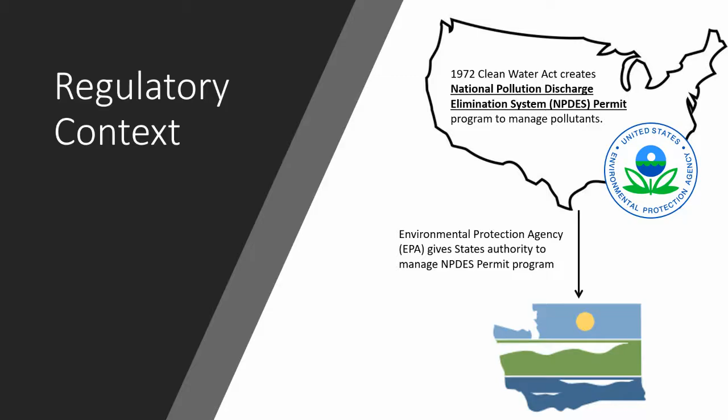The EPA authorizes states to manage the NPDES permit program. Washington State's Department of Ecology manages the NPDES permit program within the state. Ecology issues NPDES permits to municipalities like Sammamish. Sammamish holds an NPDES permit issued by the Department of Ecology. The intent of the permit is to help cities manage and control stormwater runoff and reduce pollutants entering our surface water. The city complies with our permit by incorporating specific components into our stormwater program.

Some examples of these components are mapping our stormwater pipes and catch basins, inspecting and maintaining our stormwater ponds and vaults, and enforcing stormwater rules on new development. There are several other components of the permit, but for the sake of brevity, I've only shown 3 here. The focus of today's video is on a specific NPDES program component, setting stormwater rules on new development. The NPDES permit program requires that cities adopt a stormwater manual, which sets stormwater rules for new development.

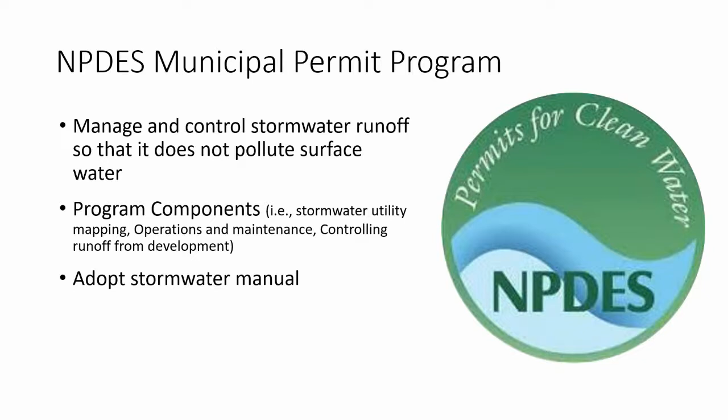I'll briefly touch upon some of the ordinances and code Sammamish has adopted related to stormwater. In 2016, City Council adopted the 2016 King County Surface Water Design Manual and Sammamish Addendum. By adopting and following the 2016 manual, the city remains in compliance with our NPDES permit. Sammamish Municipal Code, SMC Title 13, is our stormwater code. Title 13 defines the 2016 King County Manual and Addendum together as our Surface Water Design Manual.

SMC Titles 21A and 21B, the city's development code, specify that new development must follow the Surface Water Design Manual. In this way, all new development must build stormwater infrastructure to control and manage their stormwater. In 2019, City Council amended Title 13 code to add additional stormwater criteria. I'll review those amendments later in this presentation.

The city has adopted and requires development to adhere to the 2016 King County Surface Water Design Manual and Addendum, sometimes called the Stormwater Manual, Drainage Manual, or even just the 2016 Manual. All of these names mean the same thing. This is our adopted Stormwater Manual. Whenever I refer to the manual from here on out, this green book is what I'm referring to.

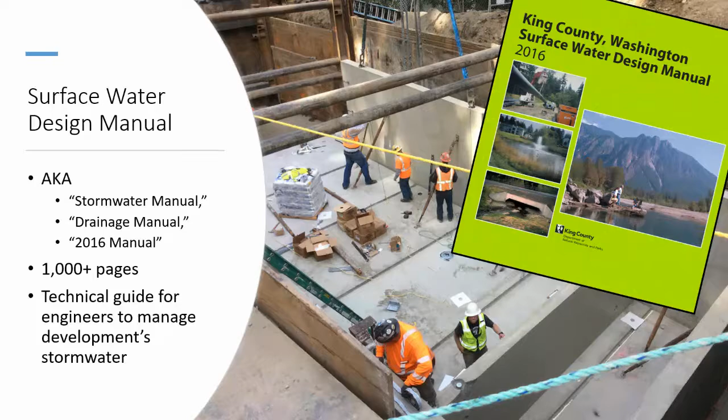The Sammamish Addendum was adopted at the same time as the 2016 manual. The addendum tailors the 2016 manual to meet the unique conditions within the city. Some examples include using Sammamish-specific forms and reducing the amount of allowed retaining walls in ponds. The addendum also contains area-specific stormwater maps for Sammamish, such as the one shown here, which depicts the landslide hazard and landslide hazard drainage areas in the city.

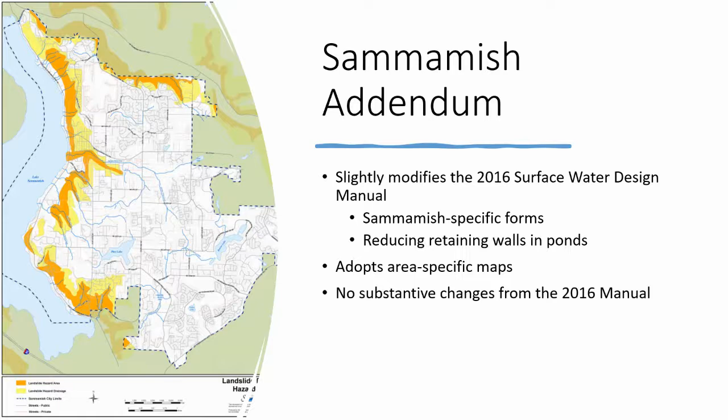Most of the changes made by the addendum are minor and were driven by aesthetic desires of the community. The addendum does not alter the fundamental design requirements in the 2016 manual. If the city deviated too far from the 2016 manual, we could risk being out of compliance with our NPDES permit or invite legal risk. Federal and state stormwater regulations have required us to adopt the 2016 Surface Water Design Manual.

Now we'll discuss the rules within the manual and how they're applied to development projects. I've done my best to condense and generalize very technical, nuanced concepts. For each PowerPoint slide here, there are dozens of pages in the manual that go into much more detail.

When a new permit application is submitted to the city, the first step in the Surface Water Design Manual is to start the drainage review process. In the drainage review process, staff review a project's stormwater plan and determine if it meets the stormwater requirements in the manual. For example, they review the stormwater pond design and make sure the engineer has designed it correctly to hold the right amount of stormwater.

Staff evaluate the project's drainage review type, which depends on the project's size and location. Staff also review the stormwater core requirements that a project must meet, which is based on the drainage review type. If the developer meets their stormwater requirements, staff can issue a permit.

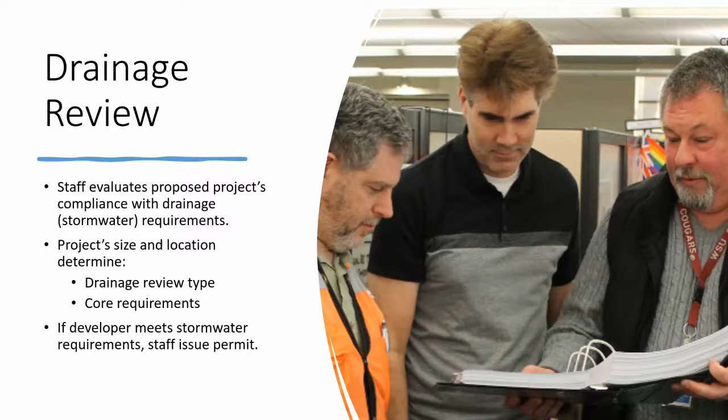As I said earlier, the size and location of the project determines a project's drainage review type. This chart shows the more common drainage review types in the 2016 Surface Water Design Manual. For brevity, I've excluded some of the less common types. The top drainage review type on this chart, which is no drainage review, has the fewest stormwater requirements. The amount of stormwater requirements increases as projects increase in size and complexity as you go down on this list.

I've included some examples of projects for each of the types of drainage review. Most small projects, like small additions or adding a deck, do not require drainage review. Simplified drainage review applies to most new single-family homes.

Targeted drainage review is unique and applies to most projects in the city's critical drainage areas. Critical drainage areas are landslide hazard and landslide hazard drainage areas, as well as areas that drain to Pine and Beaver Lake. Even very small projects in these areas must go through targeted drainage review.

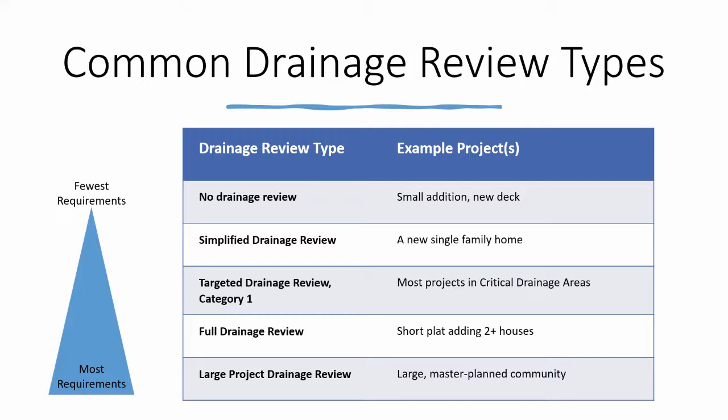Full drainage review applies to a project adding 2 or more homes, like many subdivision projects. Large project drainage review applies to master planned communities that propose to add more than 50 acres of impervious surface. This is not applicable to Sammamish.

The Surface Water Design Manual also has the 9 core requirements listed here. The core requirements are stormwater design measures a project must meet based on its type of drainage review. The project's drainage review type determines which core requirements it must meet. I've underlined the 4 core requirements that can be the most challenging for applicants to meet. We reviewed 3 of them in our last video: flow control, water quality, and flow control BMPs, and we'll go more into depth on these requirements now.

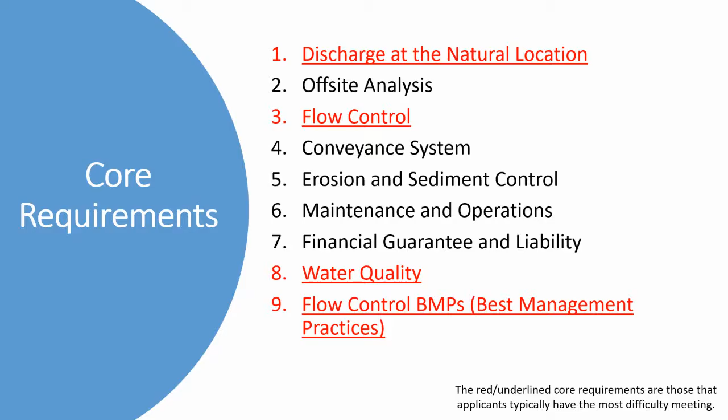Core Requirement 1 requires projects to direct their stormwater so it leaves the site or discharges at its normal or natural location. An applicant can't direct the water into a different drainage basin or watershed. The purpose of this rule is to keep water flow the same in a drainage basin both before and after development to reduce impact on our surface water features.

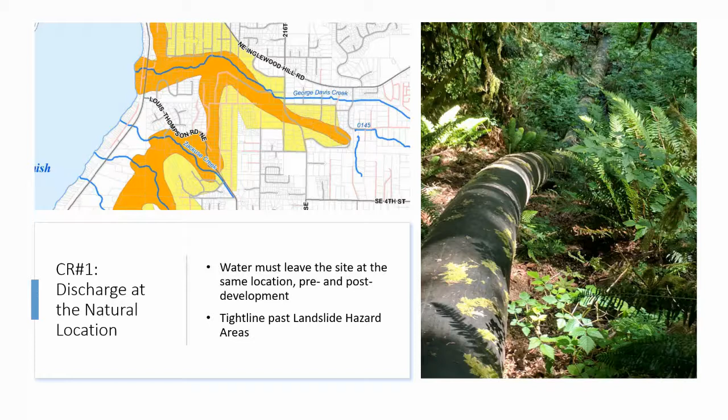Hillsides in Sammamish are landslide hazard areas, and an example of the western edge of the city is shown here. This map was adopted in our Sammamish Addendum. It shows, in orange, the landslide hazard areas. The yellow areas are landslide hazard drainage areas, areas that drain to landslide hazard areas. These maps are approximate guides only. Applicants must analyze their site to see if their property is in a landslide hazard area and manage their stormwater appropriately.

Core requirement number 3 is the flow control requirement. From the last stormwater education video, we reviewed that flow control includes peak flow and duration matching. Peak flow matching means that runoff rates from the developed and pre-developed sites must match for various sized storm events. Duration matching means the developed site must match the pre-developed site for the length of time that stormwater leaves the site for various sizes of storm events.

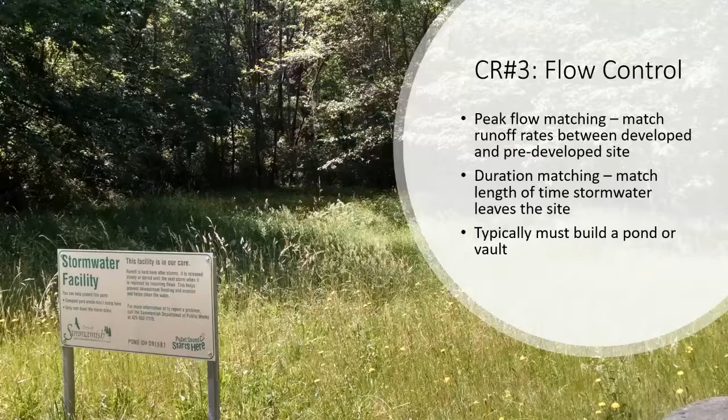To match peak flows and durations, development often must build a stormwater pond or vault to hold water on site and then release it slowly in order to match those peak flows and durations. I'm going to deep dive into the flow control regulations here because this is where Council has indicated they may be interested in making changes to the rules.

Level 3 flow control means that a project must hold its extra stormwater on site and release it at the same rate as the historic or forested site for 2-year and 10-year storms. It must match flow rates off the site for the 100-year storm as well, but for existing site conditions rather than forested. The project must also hold back stormwater and release it over the same length of time or duration that the historic site did for various sized storm events, between 50% of the 2-year storm up to the 50-year storm event.